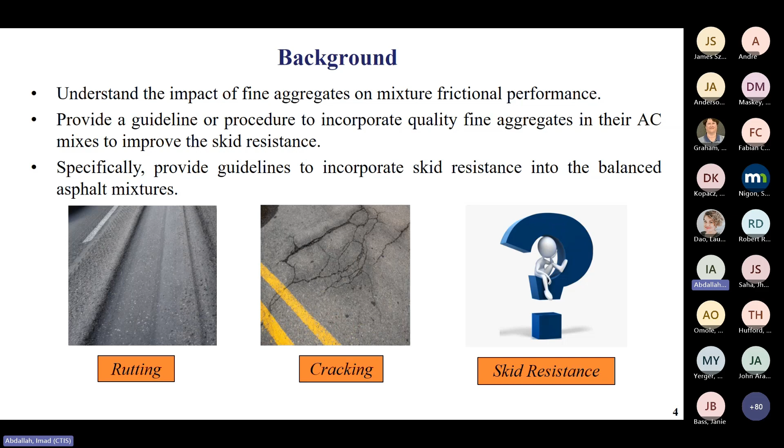Skid and friction, we use the terms interchangeably. I'll probably focus more on the word friction, but we know that in terms of an asphalt mixture, 95% of the mixture is composed of aggregates. So we really need to understand how the aggregates impact friction. That's very crucial. And in the mix design, if you look at the road after you design it, after a couple of months you go out there and the binder has worn off, right? So the focus is, how do the aggregate properties and the asphalt mixture properties impact friction? And we have a detailed investigation that I'm going to go through to show you some of the work that we have done.

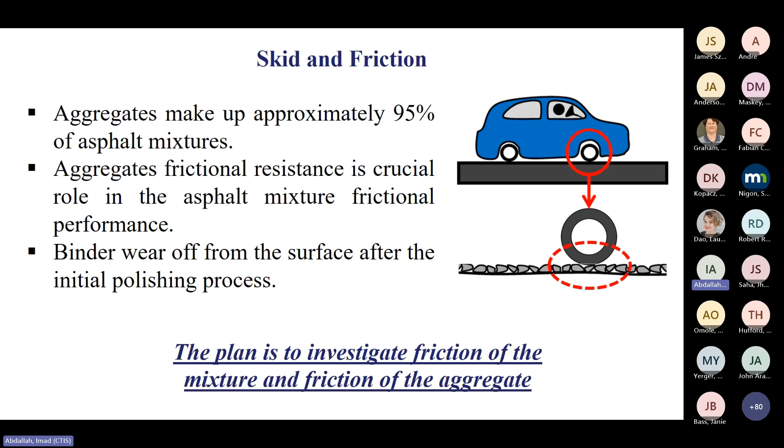On my left, I have the dynamic friction test device, which we use to measure the friction properties of the aggregate. It's a mobile device, so you can use it both in the lab and the field. We call it the DFT for short. It's handheld, about 40 to 50 pounds.

When you're ready to test, you place the device on whatever area you're looking to test. You can see the circular plate at the bottom that allows you to test the friction. It ramps up and then brakes, measuring the friction property of whatever surface you're looking at.

On the right-hand side, we use the 3-wheel polishing device to polish whatever we're measuring. Here's an example of an aggregate sample we use to polish. We slide that sample into the jig, the 3-wheel polishing device, and you see those 3 wheels cycle to the number of passes we want. Then we pull it out and use the DFT on top of that sample to measure the friction properties.

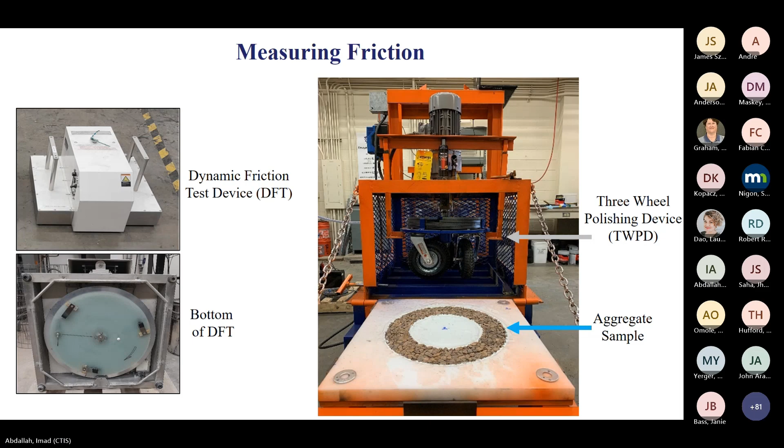So what do we do with that? This is a picture of part of the lab we have here. We're able to measure the friction on the aggregate side and the asphalt side, and I'll go over each in detail. On the aggregate side, you set up your aggregate ring.

This takes about an hour to set up the ring. You have to be very careful to make sure you set up a tight ring so you're able to measure the properties. In this case, we want to see the frictional properties of the device.

You set up the ring and use the TWPD to traffic it, and then again, as I mentioned earlier, the DFT to quantify the friction value.

Before you start any trafficking, we measure the initial friction value, at polishing cycle 0. Then as you polish it, you start developing these dots, and it behaves in a sort of power-shaped curve. You're able to fit different types of curves through this data.

If they're well behaved, you can quantify the curve by different processes, and this allows you to find the friction value at any polishing cycle. Based on research and background we've done, we go up to 100,000 cycles. That's enough - in most cases you start getting a flat line, which gives you the terminal friction value.

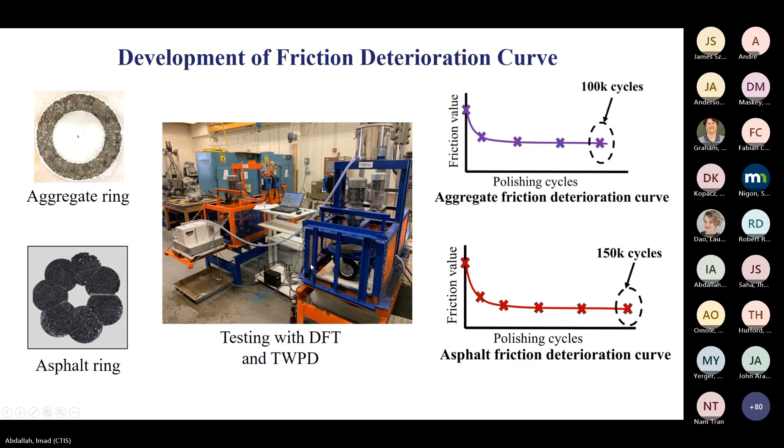I did this for the benefit of those who haven't used this before. So the first time we do the test, here's the devices, and let's say we're trying to polish a ring that we have in here. The first time we do is test it with the DFT, that's at 0.0, and then we start trafficking it.

This is an example of how—I don't know if you can hear the sound—but it's ramping up and then it's going to brake.

Once it brakes, we get the DFT value, and then we're able to plot the first point, and then we traffic it. So we slide the slab into the cage there, and then we start trafficking it, as you can see over here.

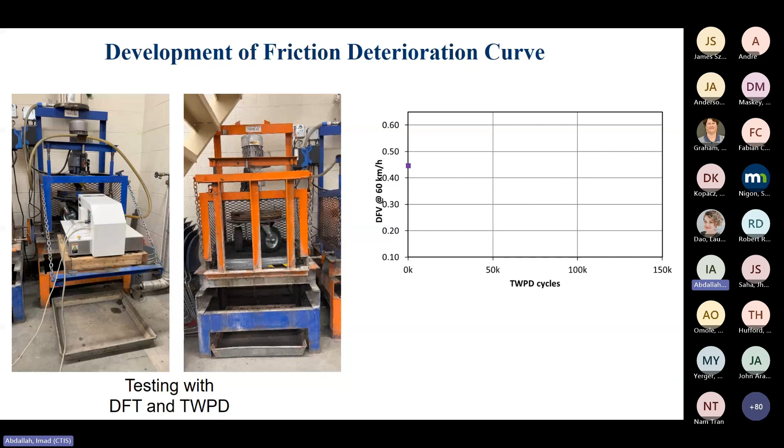So we're trafficking it, and then we go at different cycles. The first one would be at 500 cycles, and you can see the point is pretty close to here, because this is on a large scale. And we continue the process.

We measure the DFT, put it in, and get more cycles. As we develop the curve and go further in cycles, this is where it takes longer. Now we're at 50,000 cycles, and we keep the process all the way to 150,000. You can see the pattern we follow, and how well behaved it is.

This is the real data. Once we have this data, we're able to fit a curve through it if we wanted to quantify it in terms of a curve. If we're just interested in the terminal friction value, then we go ahead and report the value here at 150,000.

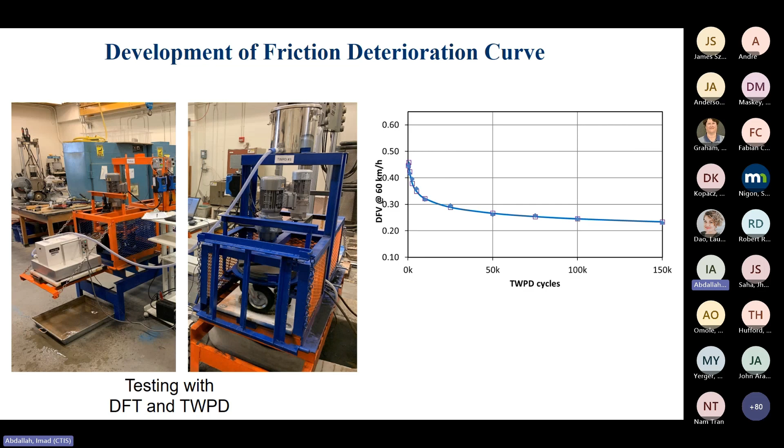So that shows you fitting that curve through it, and that's what we use in most of our work that I'm going to show you today. So I mentioned earlier I'm going to talk a little bit about the aggregate and some about the asphalt.

I'm going to focus a lot more on the asphalt because of time constraints. I'll be happy if you guys have any questions on the aggregate—we can discuss it at any other time. We have lots of data and information about it.

But this is what a typical ring looks like, and we use aggregate larger than, I think, the number 3/8—whatever is retained on 3/8—to set up this ring. You can see it being trafficked, and then using the DFT and developing the curves.

I have here an approximation—this takes 40 hours to run this test. What do we use this for? We kind of use this to let us know how good the quality of the aggregate is that's going to be used. First of all, do you want to use this aggregate in the mix? Is this an aggregate you can use as a classifier into your specifications, if that's what you want?

Another way you could use it is when you're developing a mix design and blending different types of aggregates. You can also use this here to see what would be more or less, on average, your final friction value based on the aggregates.

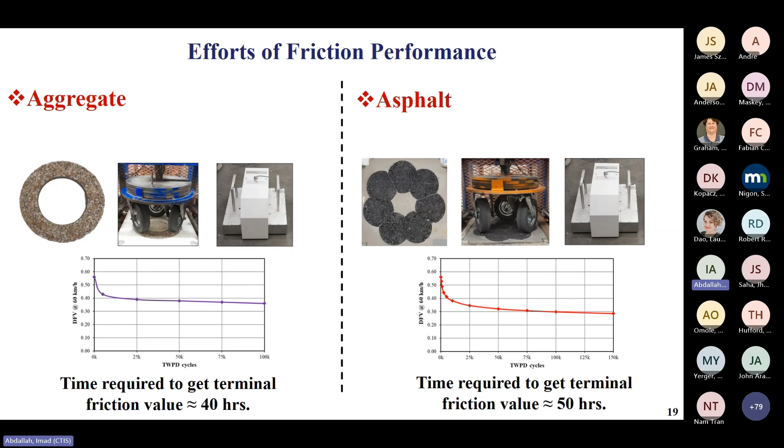So I'm going to jump straight to the asphalt part of it. One of the things we did is we wanted to look at the impact of the asphalt parameters on friction performance: does the binder percentage matter, does the binder grade matter, air voids, aggregate gradation, asphalt gradation, and aggregate quality. So we looked at all 6 parameters in terms of friction performance, and we set up a very controlled experiment to do that.

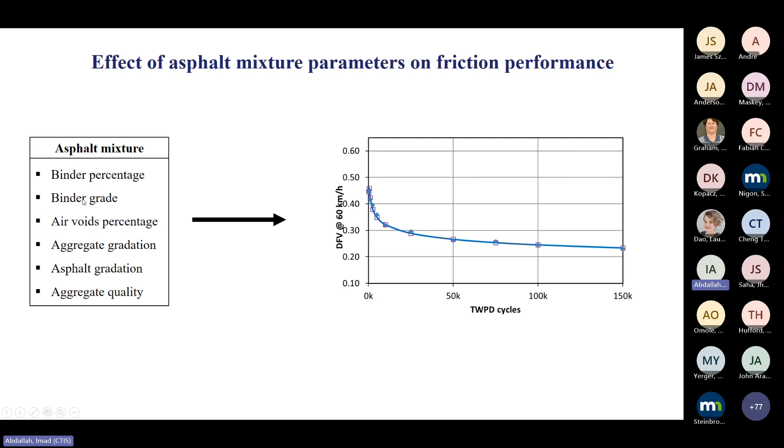So at each of those parameters I mentioned previously—binder percentage, grade, air voids, and the rest—we're going to do the same thing. For those varied parameters, we're going to plot them in a bar graph just to show comparison of the friction value and see if there's an impact.

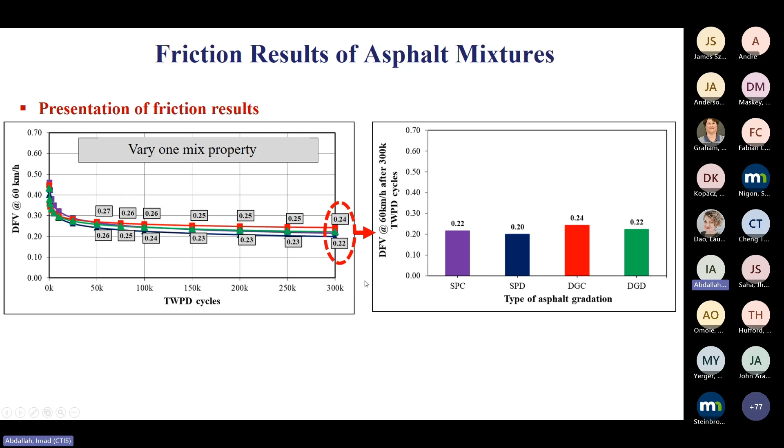So how did we do this? To control the experiment and look at the impact of these mixture parameters, we got a typical mix that we use here in El Paso. We got that mix and said, this is what the typical mix looks like, but we are going to control this mix. We're going to make sure it's all from the same source of aggregates.

So we switched some of these bins out and combined them to make sure it's all limestone, using one source of aggregate. We mixed that together using the Superpave mix gradation and sieved it into each bin size, which is what we use to control. So now we know we're using 100% limestone, following a Superpave mix design, and we can vary those parameters to see if there's any impact.

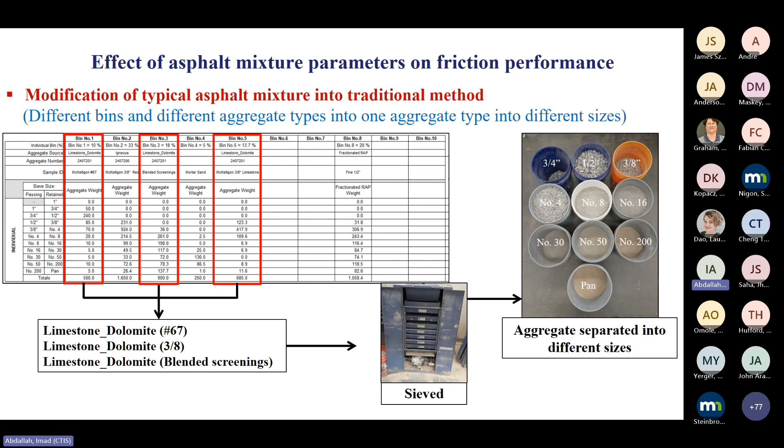So we wanted to make sure we use one source of aggregate so we could control the experiments, and for that we start looking at the different parameters I'm going to show you here.

So the first one we looked at is the binder percentage. Sorry for this animation, it's not working right, but anyway, just to show you.

We looked at the binder percentage first, and this is the result. We looked at the terminal friction values you see here, and you can see there's not much change going from 4.1% to 7.1% binder. We looked at different binder percentages, and the impact isn't much across the range we tested. So we know that in terms of terminal friction value, the binder is not playing an important part.

The second one was the binder grade. Sorry about the order of the graphs, I got my animation mixed up here. So the result is for binder grade—we looked at typical grades used locally: PG 64-22, PG 70-22, and PG 76-22. Again, a very similar trend in the results; there wasn't much impact here.

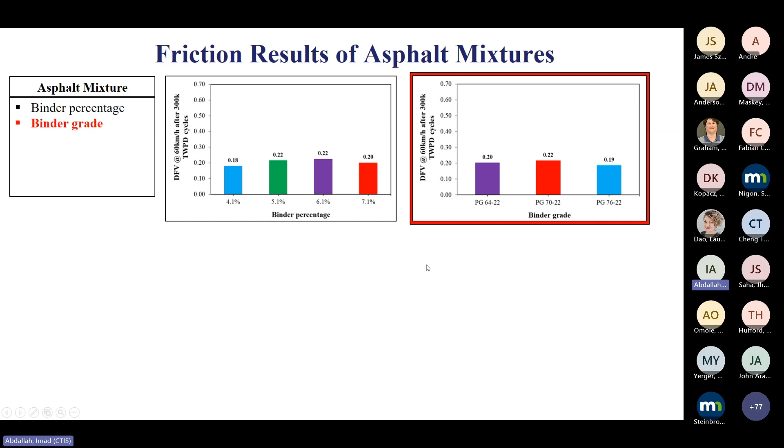I got to go through this process each time.

Sorry about that. So the other one is we looked at the air voids. We looked at two extremes: 7% air voids and 3% air voids. And in terms of air voids, it might play a huge part in terms of rutting and cracking, but in terms of friction, there wasn't much difference.

That's why you're going to see a lot of agencies, when they're looking at friction performance, compact using either a slab or core, so you can go either way.

The next parameter we looked at is the aggregate gradation, and we went 60-40 in terms of passing retainer number 4 and passing number 4. We went 50-50, and then 40-60, just to see if there's much impact on the gradation. Again, all of this was done with one source of aggregate, limestone, and there wasn't much impact here.

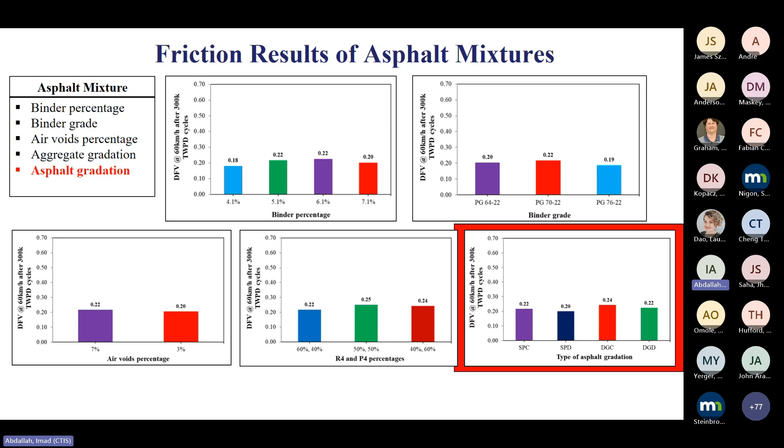The last one we did was the asphalt gradation, and also not much change. So all these properties seem to affect rutting and cracking highly when designing - these 5 parameters play a very important part in that. But it wasn't as impactful on the friction performance compared to the last parameter I'm going to show you now: the aggregate quality.

For the aggregate quality, we ran an experiment like this. We went with mix 1, let's call it, with 100% limestone - that's the control gradation we used. And then we substituted the entire gradation of aggregates, following the same gradation, with 100% sandstone.

We know sandstone is a much more superior aggregate quality than limestone. We did mix 1 with limestone and mix 6 with sandstone. And I'm going to show you this based on these 3 fractions of sizes.

Group 1 would be retained - everything above retainer number 4, which we're calling the coarse side of the gradation. On the bottom side, passing number 30, which is the fines. And then we came up with this middle portion here, which is the coarse fines - passing number 4, retained on number 30. So we broke it up into these 3 stages first to look at how the quality of the aggregate is impacted.

You can see here at 100% limestone, we were getting 0.25, but at 100% sandstone, the value is 0.4. So there was a big jump between 0.25 and 0.4 here. These are the 2 extreme values.

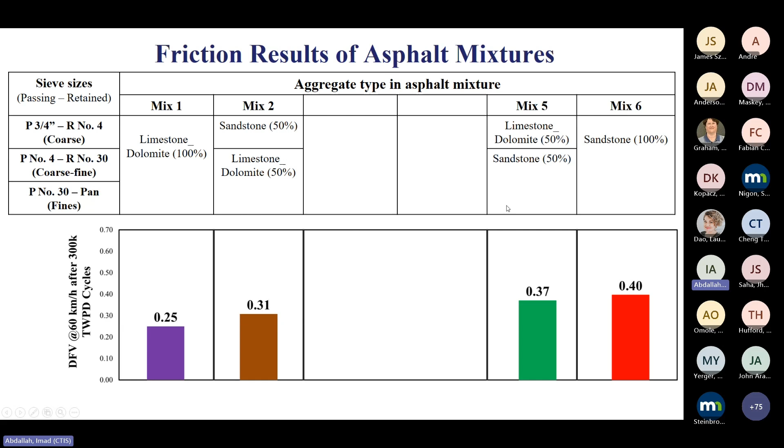We ran that test too, and you can see here, in this case, there was a little bit of improvement, but the big jump - closer to 0.4, which is the goal we want to reach - we wanted to see which one gets us closer to 0.4. You can see 0.37, for everything passing number 4. When we use sandstone, we were able to achieve 0.37 in terms of the DFT value at 300,000 cycles.

So we said, okay, now we know we need to focus on this area right here. Let's break these 2 up and see which one is controlling. So we went with mix 3 and mix 4. We kept the limestone the same, and then here you can see we switched, but had to keep the controlled gradation - that's why you see the different percentages here.

So we went with sandstone here, 36%, between what we call coarse fines. And then in terms of passing number 30, you see the limestone here where we varied it and put sandstone. Looking at these two results, you can start seeing that the sandstone, in this middle portion of the gradation, contributes to most of what you get here with the 0.4.

Looking at mix number 4, for instance, most of it, the coarse side and the fine side, is made out of limestone. But the coarse fines, which is the middle portion of that gradation, is what seems to impact the most and give you a much closer value to where if you're using 100% good quality aggregate.

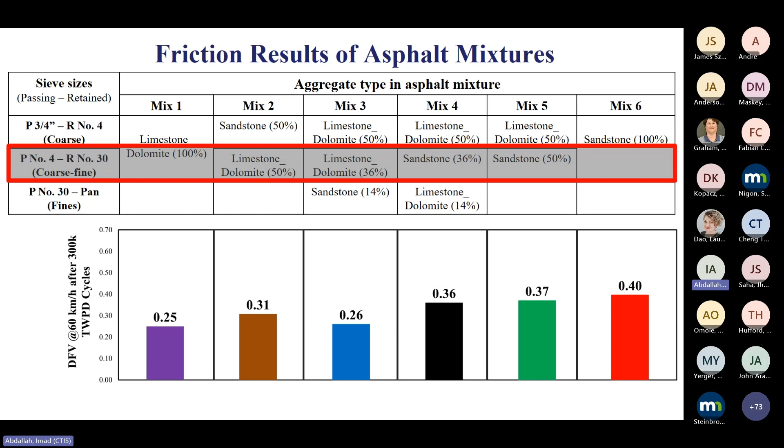The concept we're trying to show here is that to control the friction, you need surface area on the surface to be able to control the friction. The more surface area you have, the more you can control the friction.

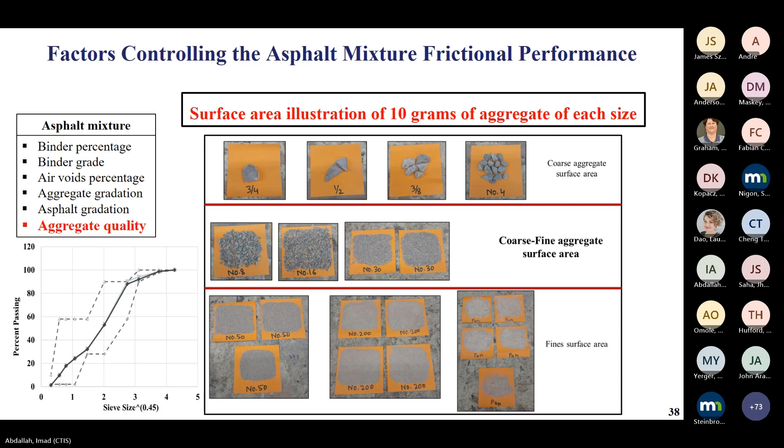Now that we've done that, I'm showing you some of the new efforts we've been looking at with what we have done.

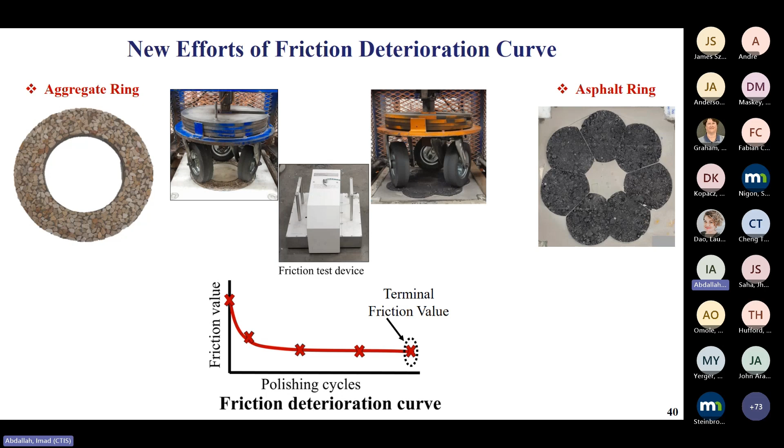I divided this up into the aggregate side and the asphalt side. I'm going to go over a little bit of the work we're doing on the aggregate side first, and then I'll talk about the asphalt. So one of the issues we had here is this test is very time consuming.

Is there a way to reduce the number of hours? We looked at several options here. The way it works, just to go over it quickly: you have your stockpile, you get your aggregate, you sieve it, you get the retained number of 3/8, and you build your molds.

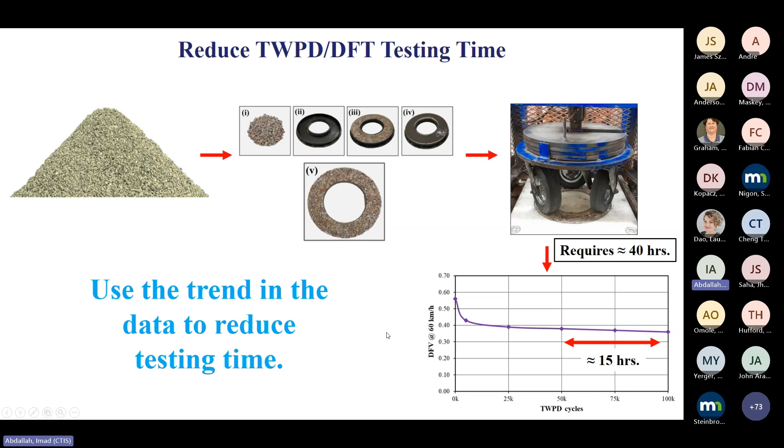Then you run your test, and it takes 40 hours to generate this curve. Well, can we use this graph and the trend line, since we know it's very well behaved, to predict the terminal friction value right here instead of testing all the way through? That was one of the exercises we did.

And the answer is yes, we can. We tried many ways, I'm just going to show you an example or two. We said we're going to quantify this curve by some type of function, similar to a power function, and look at measuring, for example, at 0, 5, and 25,000 cycles, to see how we can predict this curve. So we ran the whole curve, but we would use these two points to see if we can predict the terminal value.

You can see the results here. The red is the measured value, and the predicted uses the power function. You can even improve this by using other functions. You can see they're pretty decent results in terms of getting the friction value. The difference between the two is shown in green. We looked at sources all the way from limestone to gravel, to granite, to sandstone.

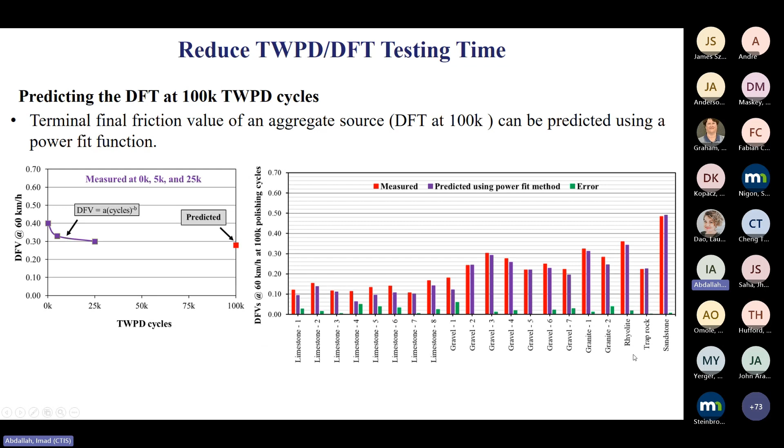Another exercise we did: we tried different combinations but wanted to see which one is most relevant. We simplified the equation, not going through the math of it, but we looked at this curve using the power function, the beta function, and said, if we can quantify it and normalize our DFT to the maximum value...

So we would normalize it to 1, take this raw data and normalize it to start from 1. We're able to eliminate the alpha parameter, or the A parameter, and just focus on the beta. So you have the beta parameter, and that's the one parameter we need to worry about. Let's see if we can predict the terminal friction value, and maybe use that beta as a quantifier.

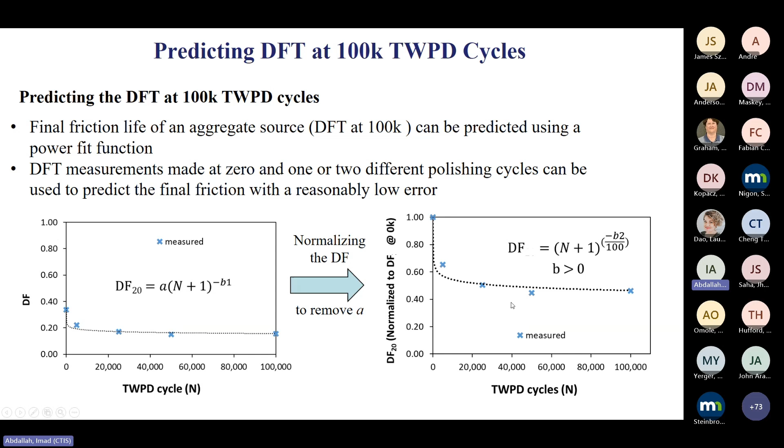So we did that, this is an exercise here. We only used data at 0 and 50,000 cycles, and you can see we were able to predict at 100,000 cycles with pretty good accuracy. The error bars here are plus or minus 15%, and most of the data falls well within that. You can see the equation and the R squared, pretty good.

I think we had about 47 sources of aggregate or somewhere in that range. So that gave us an indication this is something very feasible. As we collect more aggregate, we can reinforce this equation and get something more reliable to use. But we don't even need to go all the way to 40 hours—we were able to reduce it by at least 15 hours for the test.

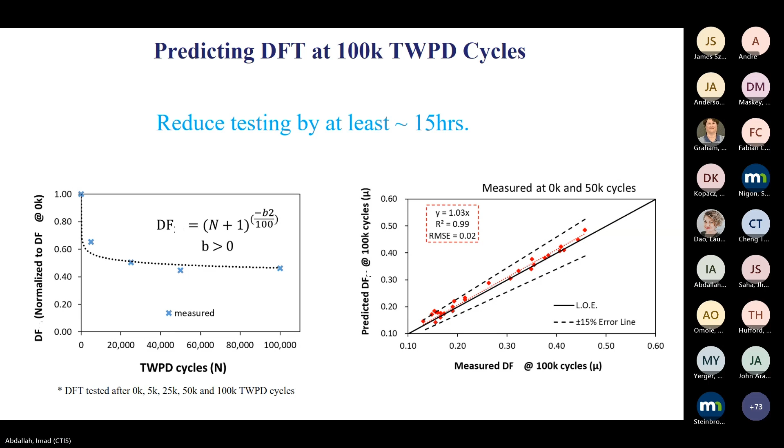So that's some of the work that we did. Another area we worked on was, can we eliminate using this test completely? One of the things we looked at was the mineralogy. We looked at angularity, texture, and then mineralogy, and this was the most important one. I'm going to show you a little flavor of that.

So we have an XRF, a portable XRF. Can we take this aggregate and get the elemental components using the XRF, and can we relate that to the curve? We had already developed these curves for many aggregates, so we went back and started measuring the XRF and getting the elemental properties of them.

The good thing about this test, if you're familiar with it, is it only takes about a few minutes. We said approximately half an hour, but it literally takes about a minute or two to test one aggregate at a time. You can do multiple aggregates. We have refined this since then.

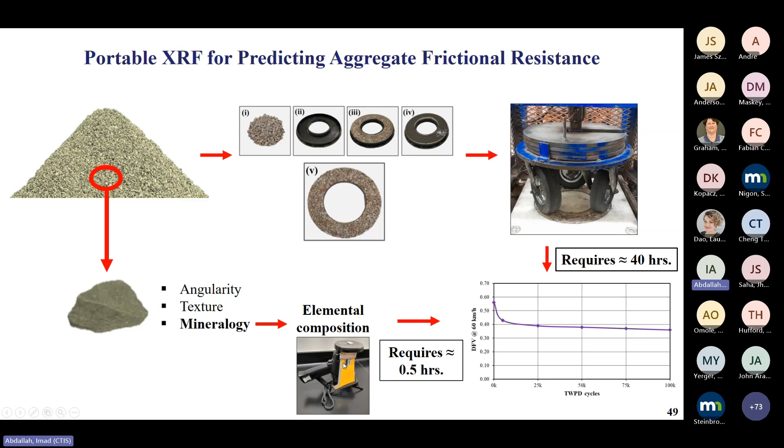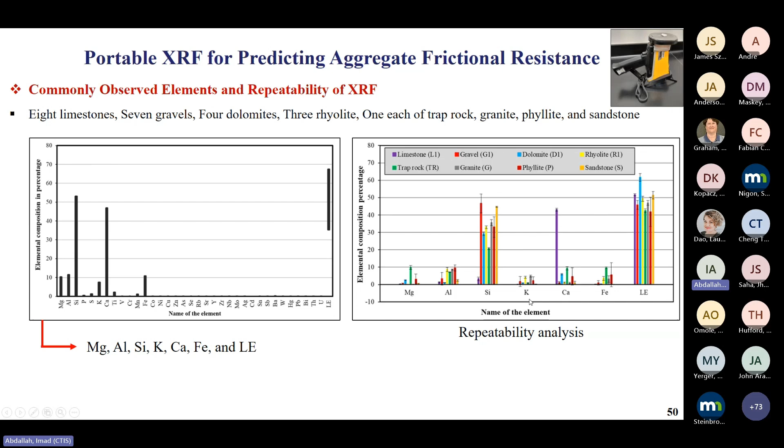We focused on these elements and said, okay, can we take this and do a neural network model or any type of AI model or even a regression? We had 26 sources of aggregate. We looked at an artificial neural network in this case, and we started predicting the curve. So in this case, we're not only predicting the terminal, but we decided we want to predict the entire curve. So we're predicting the friction value at 0, 5, 25, 50, 75, and 100,000 cycles.

You can see we use the training set and the testing set if you're familiar with ANN models. Most of them are much higher than 0.8 in terms of R squared, so it was very reasonable. Again, we only started with 26 sources, but we have been ramping it up, and now we have over 80 sources to improve our model with that.

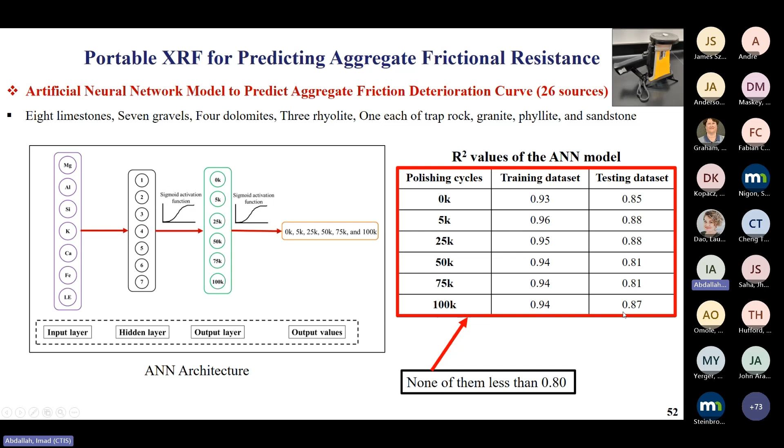So again, as I mentioned, you have very good results. Our R squared is larger than 0.8. The one that's most of interest would be the 100,000 cycles, and you can see very good results. But again, you can quantify the entire curve.

This is some of the comparison from the testing set that we had, so you can compare the two curves, and you can see very well, pretty decently behaved if you look at the data for different types of aggregates. And I'm showing you the raw data without fitting the curve through it. This is actual raw data at each point that we use the neural network model.

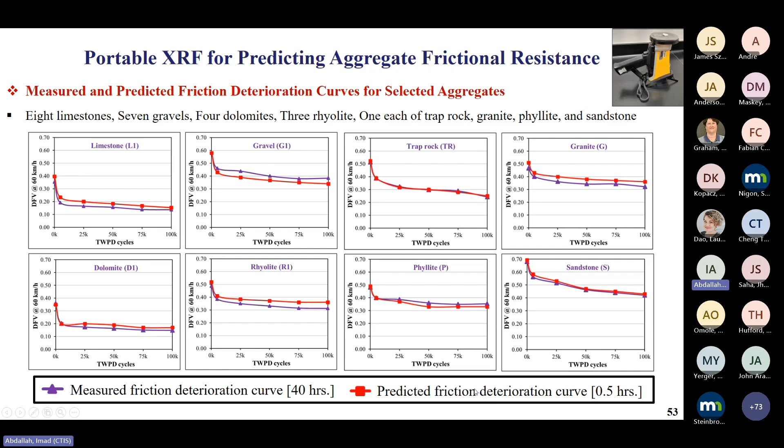Now, the advantage of this is if you want to rely on that, you don't need to look at running this test at 40 hours anymore. A few minutes and you have your results. So huge advantage with this process. We have a couple of papers out there that we're more than glad to share. You could look them up to go over some of the work that we have done.

So this was a flavor of some of the aggregate work that we have done in the past. We are doing more of it. We have refined our XRF testing to give us more accurate results. And now I'm going to go over, I have a little bit of time left. I would like to go over the asphalt side.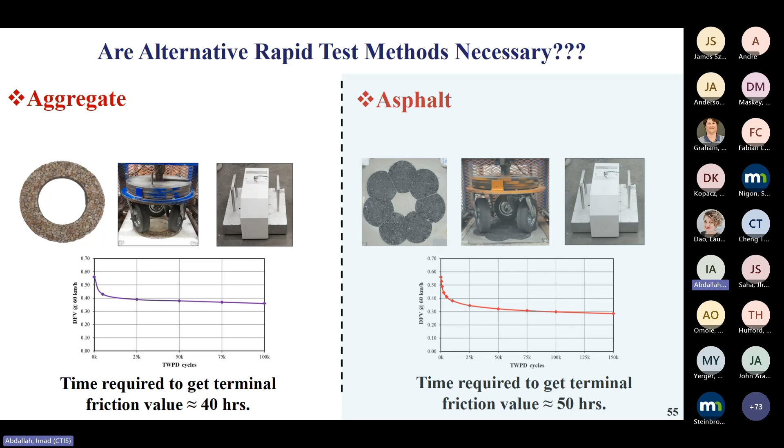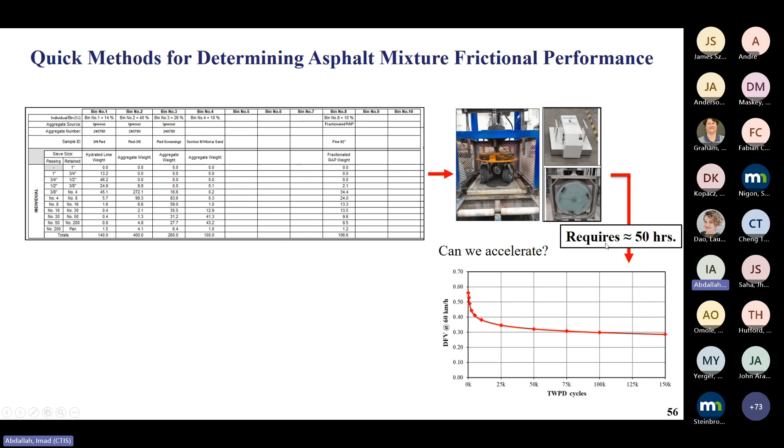Same thing we did. We said, okay, what does it take to reduce this 50 hours? We took the same approach, so I'm going to go a little faster here because it's the same process. You have a mixed design, you have different sources of aggregates. We can look at it and say, okay, how can we use the aggregates data to predict the terminal friction value in the mix? And how can we reduce this to go less than 50 hours? How can we accelerate this process?

So one of the ideas that was used, not by us, but by the DOT, was a blended DFT. They would take the aggregates, and based on the friction value of the aggregate, they would do some type of a weighted average and sort of give you an idea of what the blended DFT value would be. And that kind of helps in your mix design. So we wanted to take that process and see if we can improve on that. And we looked at a couple of ways to do that. I'll go through that right now.

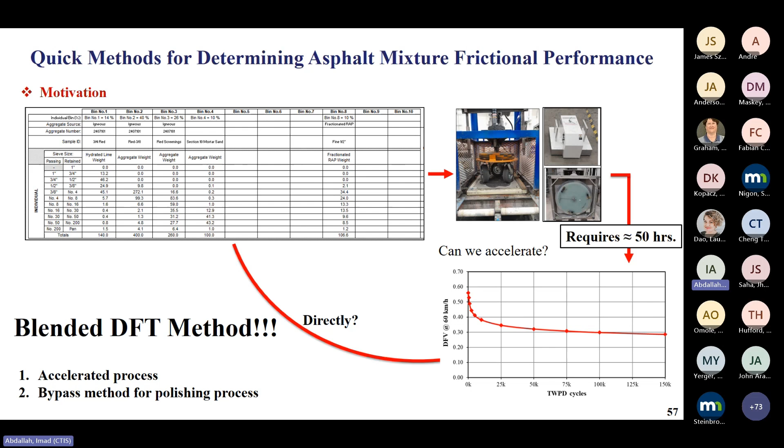So this is the traditional way I showed you earlier, right? You measure it, it takes 50 hours to do, but you go through this process and you develop this curve. This is the traditional measurement that takes 50 hours to do, and you have the curve that quantifies the mix in terms of friction.

Another way we did is sort of what we did in the aggregate, is use the initial values to predict at 150K. And we got very well behaved results, and I'll show you in a minute.

So we used a similar approach that we use for the aggregate. This is a lot faster. We are able to recut our time to just running it up to this point instead of all the way.

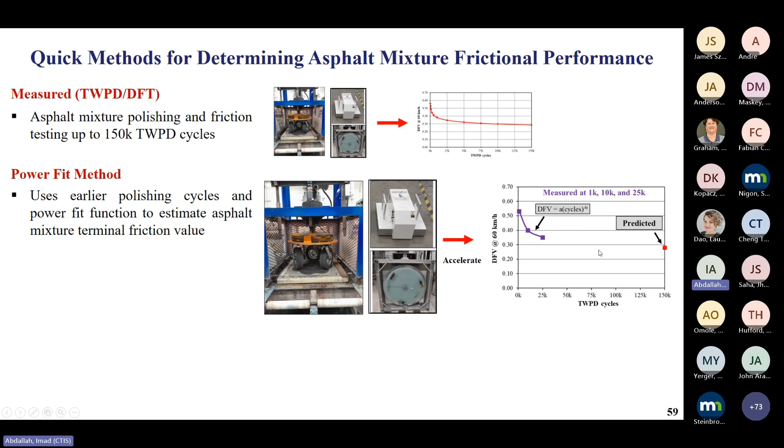Another one we wanted to look at is the modified blending DFT, where the middle portion of the gradation is the one that controls the quality, the friction value. So if you have a good quality aggregate and you focus it on that middle portion of the gradation, you're going to get good friction value.

So we use that concept, and we're still finalizing this. It's going to be coming out soon.

Who's going to be called Dr. Sandeep, really soon, is the one who we're publishing this with. I think it should be in publication right now. And he's going to be defending his thesis this December on this work, sort of modifying this a little bit and improving what was done in the past.

And then we also used the blended value that was there originally to compare. So we have these processes. This is the measured, let's say this is the controlled, and these are the different ways that we came up with. The one that says blended was already being used. This is what's based on the weighted percentage. And so the power fit method and the modified blended is what we have been playing with to improve the performance.

The required time for the first one, we said it was 50 hours. If we do it this way and only get the first few cycles, we're dropping it down to 16 hours. So we're really cutting it maybe in third.

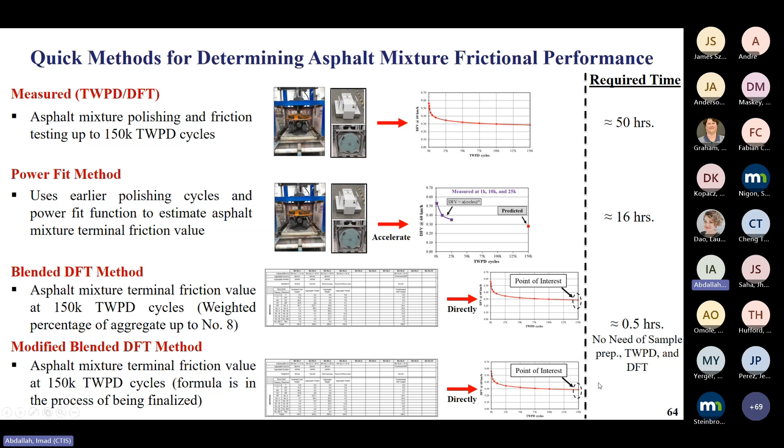And then we do the modification based on what I said, that the coarse fines - very similar, improved on this equation right here to come up with that value to give the designer a way if they want to look at friction when they're doing their mix design, they can do that. This is a very quick method, eliminating, bypassing the TWPD and DFT.

So we have a total of 47 asphalt mixes. We broke it down into 33 mixes when we developed the power curve and the model, the weighted - not the weighted average, but the modified blending. And we kept 14 of them as testing to verify.

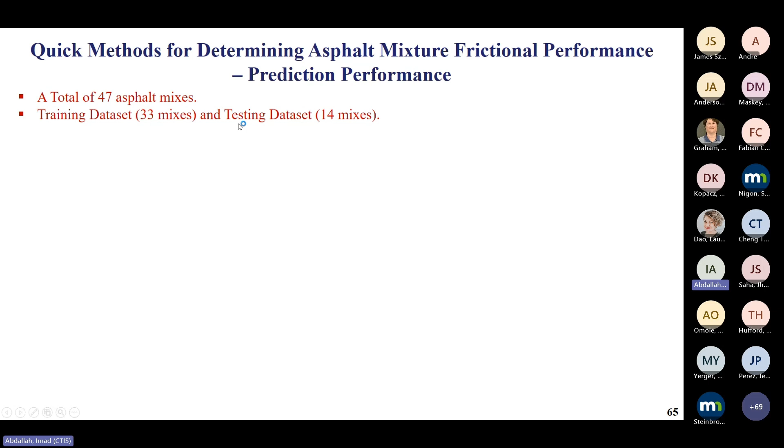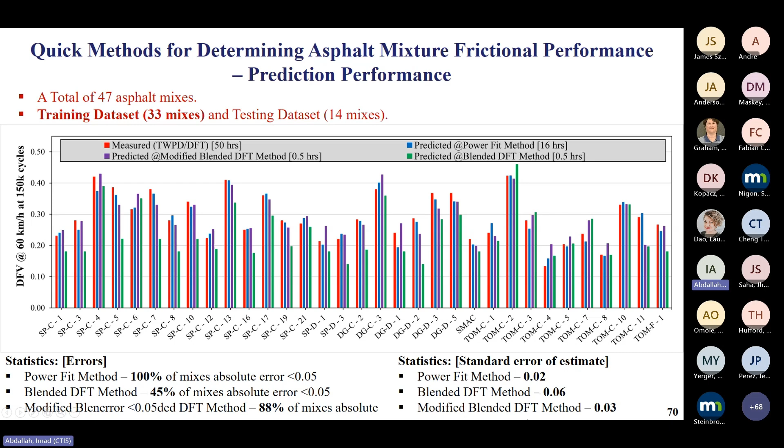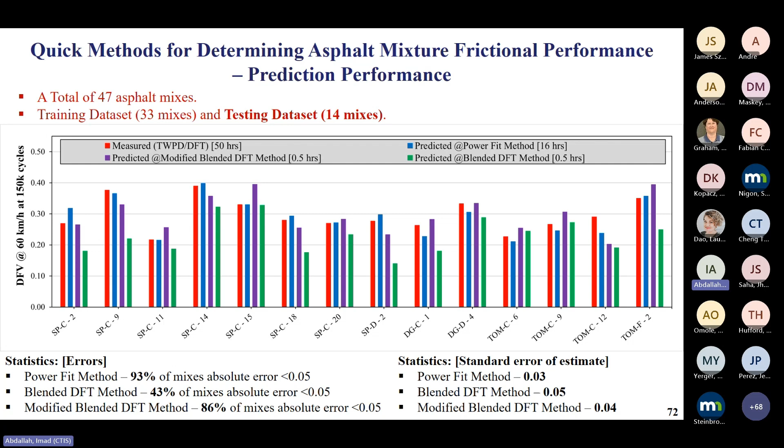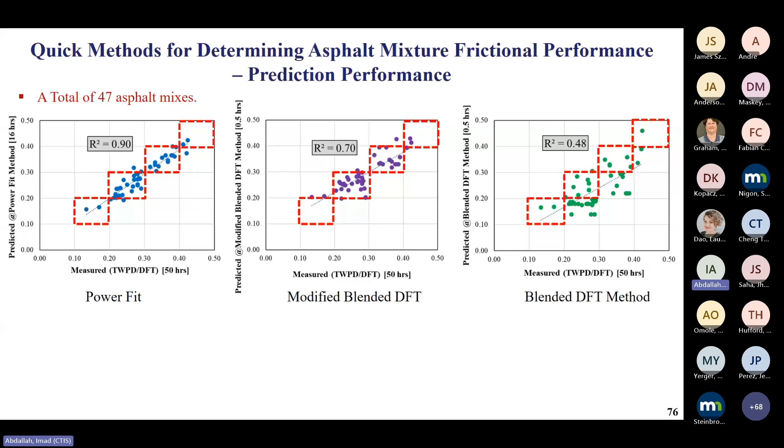This allows us, if you want to do a mix design and look at things besides cracking and rutting - if skid is part of your process - you can use the power fit or any of those methods to help with your mix design, to see how good your terminal friction value is, instead of being required to run the full 50 hours.

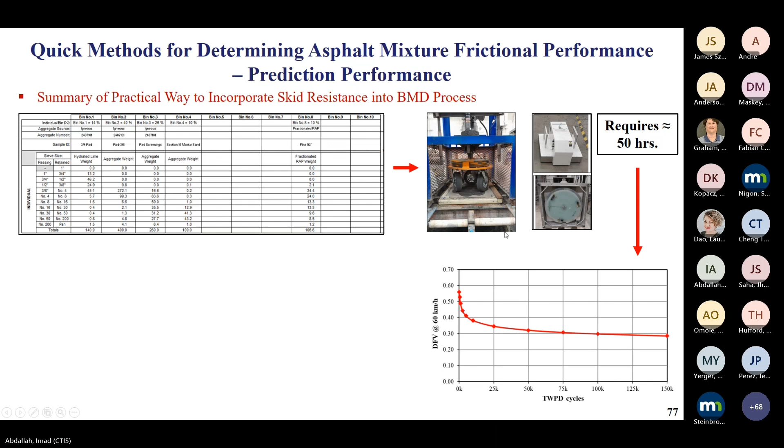But I wanted to take you full circle. This is something we're really happy about, and we've been working at it from both directions - you can go even further than that. You can start with the elemental properties from the XRF, so you have your stockpile, and from there we can tell you how good your mix is. We're a long way from that, but this is the idea: if we can go from here all the way to the mix design, I think we're onto something - maybe we can bypass this test completely. As I said, we're a long way from that process, but that's the approach we're heading to next - going full circle.

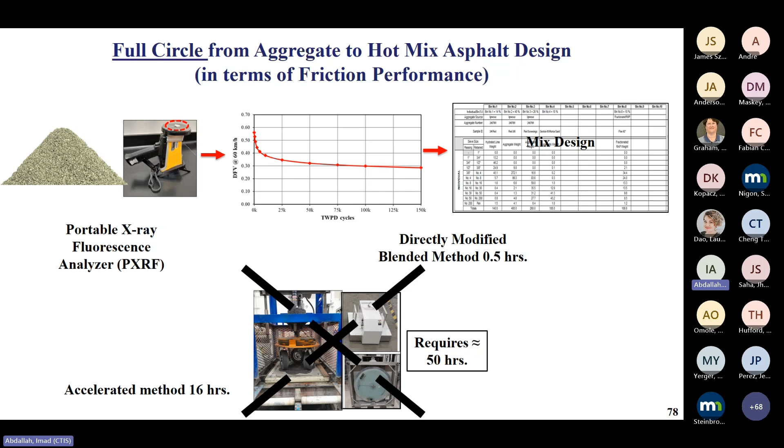Some of the efforts ongoing right now involve being able to compare - one of the things we have is this DFT device, which allows us to do the test in the lab and in the field. So we're happy about that - we're comparing lab and field data.

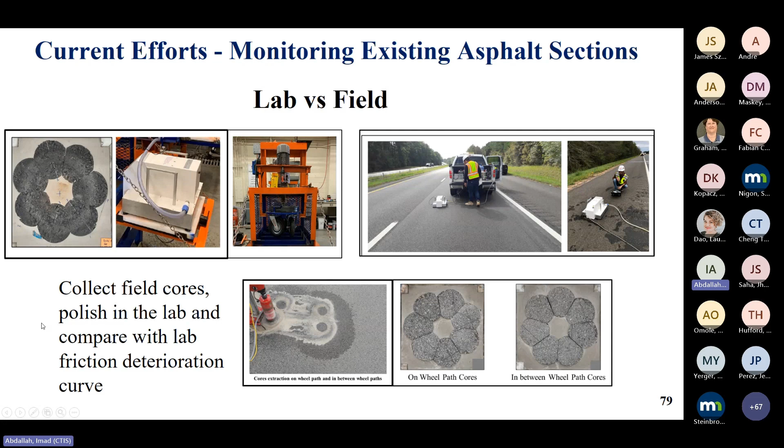The other advantage of this is you can core your samples from the field and bring them into the lab to generate the curve. So let's say you build a section - we know compaction in the field is different than compaction in the lab. You build your section, get those cores, and bring them into the lab. You can do them either on the wheel path or in between the wheel path, bring them to your lab, generate that curve, and see how it behaves. It gives you an idea of how good your friction value is. That's one area we're looking at right now, and we're doing several sections.

The other thing we're looking at: at the end of the day, when we look at data in the field, it's about skid - not friction. That's what we measure in the field, that's what the DOTs measure. So a huge part of our effort right now is how we can relate all this friction information to skid in the field. That's another future effort, but we're working on it to make sure we correlate it, and we're starting to do that with the DOT.

Another thing we're doing is looking for test sections. We'd like to put some test sections out there based on the concept I mentioned, where the coarse fines control things. For example, if there's a section going to be put out there, you have your control - we can use that as a control section, and based on that mix design, we'd improve it by looking at that coarse-fine portion to improve the friction.

So we might have to do a substitution of one of the bins, putting a little better quality aggregate, but only on that coarse-fine portion of the curve, and show you how we can improve the friction. Or if you're using a really good quality aggregate to begin with, we can reduce the amount of it—because we know how expensive and scarce it is—reducing it to where it's needed on your gradation to give you the same type of friction value without impacting performance.

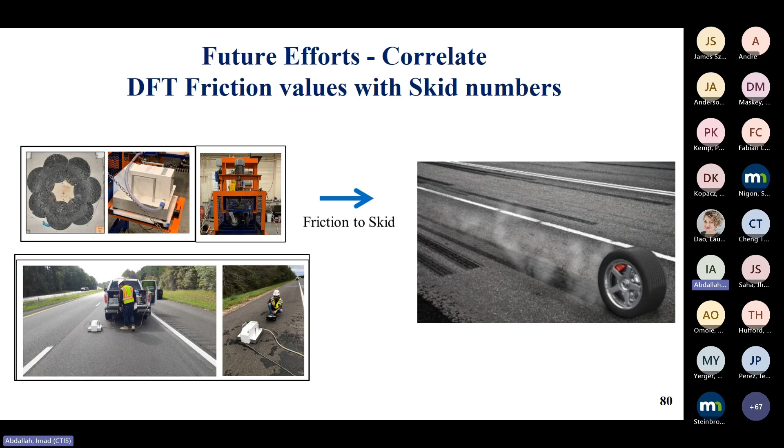We would be working with a lot of suppliers, looking at their sources and helping them with that. One of the things we would love to do is demonstrate this concept and put some test sections out there. I think that was it.